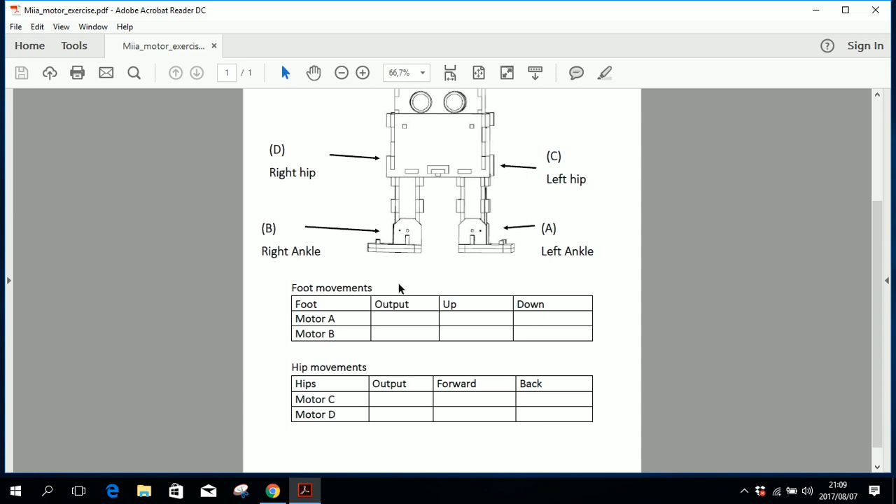So what we're gonna do is we've created this sheet, this MiiA motor movement sheet, and that just tells you which way the motors will move under certain commands. You may think it's the same on both sides - I can tell you now that it's not. So prepare to be surprised, or not surprised since I just told you that.

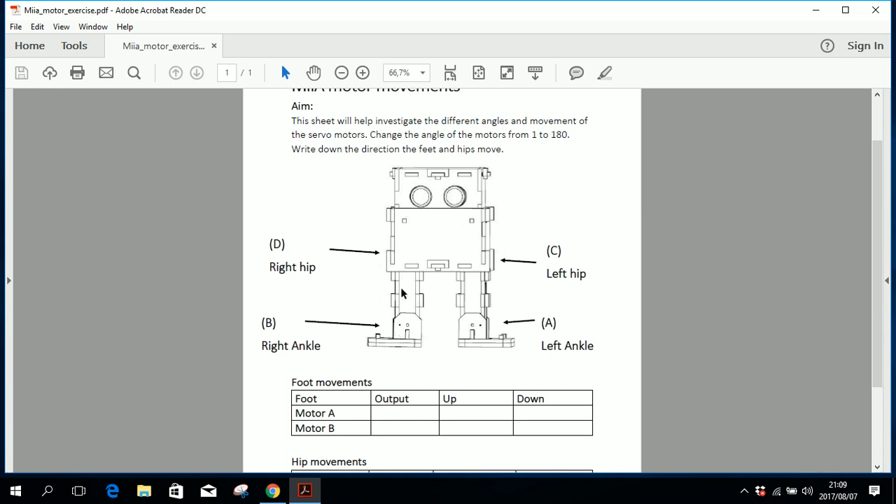So on the sheet, the aim is to investigate the different angles and movements of the servo motors. The way we do this is we're going to change the angle of the motors from 1 to 180, and write down the direction the feet and hips move. So you can see here left ankle, right ankle - that's A and B, left hip, right hip - C and D, and that's in this table over here.

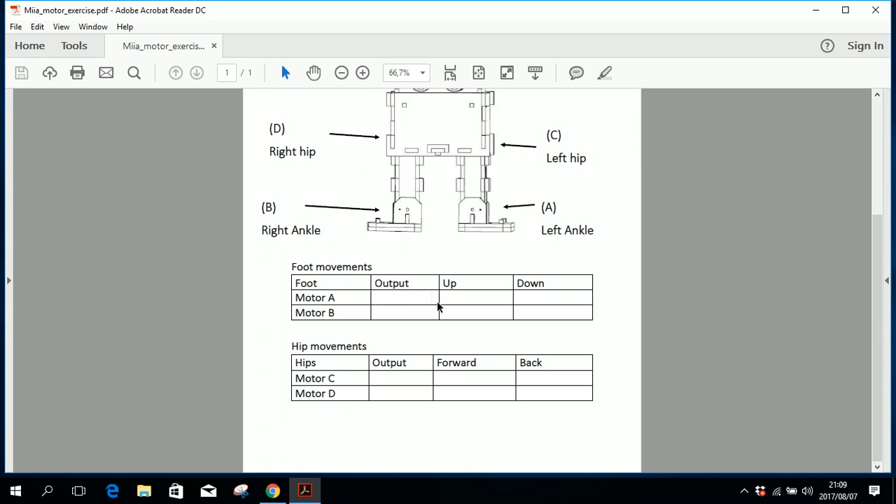And the output is either output 1, 2, 3, or 4, depending on how you connected your robot up - I'm not going to tell you which one, that's going to be part of your investigation. Then in the up and down column, you're either going to put in a 1 or 180, or vice versa, depending on how your motor moves.

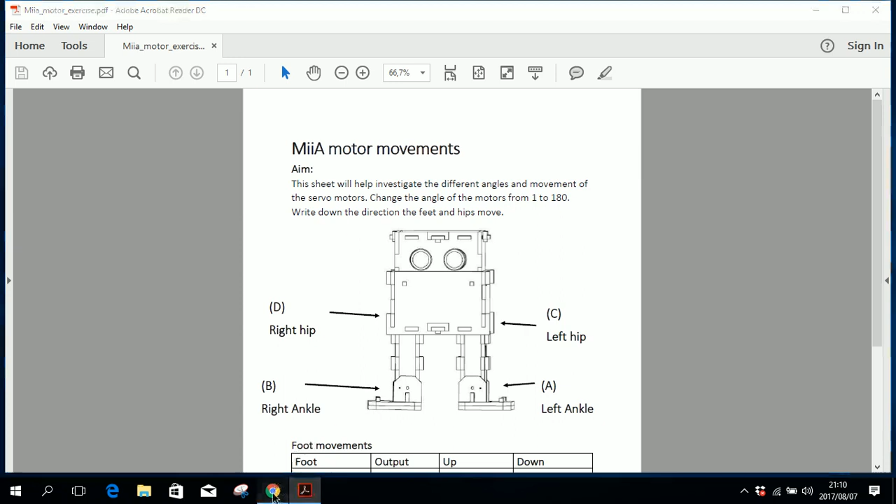So this is your sheet, and the way we're going to investigate this is we're going to go to the Lofi blocks back here - you can see it's connected - and we're going to create a new project: motor movements investigation. Yeah, it's quite a long name, but what can you do? Okay, motor movements investigation.

The way we're going to do that is a bit of a crude way. We're going to just say this one goes motor 1, 2, 3, and 4. So on my robot, this is the left ankle, and I'm just going to put in 180. And I'll press play.

And you'll see that either your foot's going to go up or it's going to go down. Depending on that, you're just gonna say, okay, if so mine goes up, so over here let's just put that in.

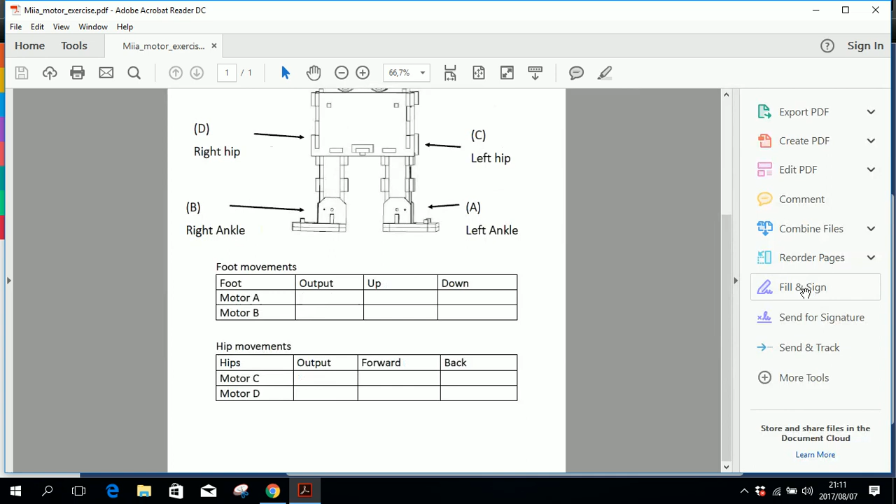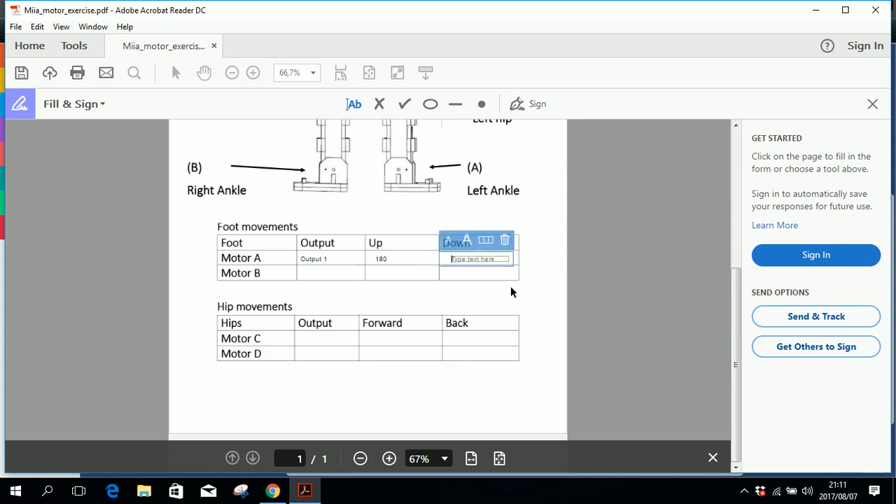Fill & Sign, okay, let's just - yeah. So over here, motor A, it's gonna be output 1, and then it goes up when I put in 180. So I can assume that it's gonna go down when I press 1, but you can check that.

So you can click that and we can go 1, and it should be down now. So by doing that for each one of these outputs, you'll know exactly which way it's gonna move.

So for your hips, I assume it's gonna be 3 or 4. And then this, the motor either went forward or back. So if you wanted to go back to the initial position, we put it at 90, so you see it's straight now. And if you want to check 180, you can see, okay, it went forward or it went back.

And yeah, so this is just going to be the investigation that you're going to do, and just populate it like I've done over here, and fill out the output 1, 2, or whichever way you connected it, but I assume it's going to be 1, 2, 3, 4.

And once you've got this, it's going to give you a good understanding in the future to know exactly which way you want your motors to move so MiiA can achieve different things. So yeah, thanks.